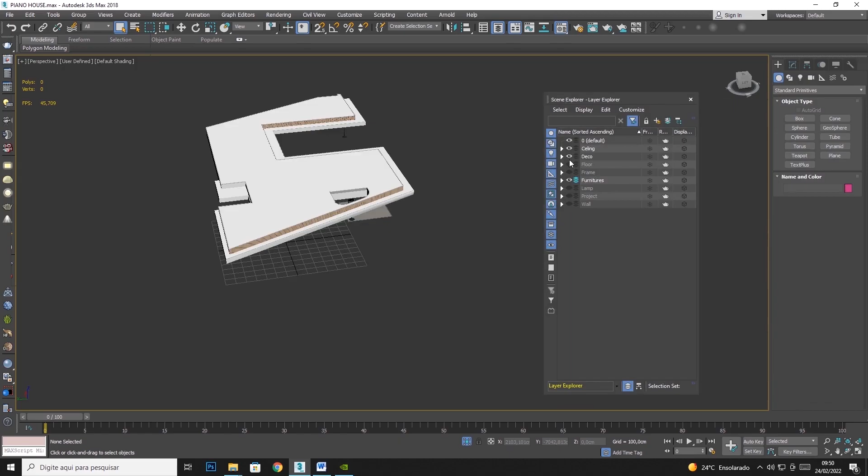This project here, we don't need to use it because it won't go to Unreal. A very important thing is to map the number one channel to take the project to Unreal. It's not really essential, but it's a good strategy to do for some objects based on one criteria. Let me show you what the mapping of the number one channel is, on Unreal.

What's the criterion I'm going to use to define if this object needs to be mapped 1 for 1? Let me open a parenthesis here. When we talk about Unreal Engine 5, we basically use the Lumen technology, which we'll talk about when we get to Unreal Engine 5.

In Unreal Engine 5, if we use the Lumen technology, we don't need to open the mesh, meaning we don't need to open channel 2. Using Unreal Engine 4, the light information—something we call build—is stored in channel 2 of our model. With Unreal 5, specifically Lumen, everything happens dynamically. The ray tracing happens instantly, so we don't need to store the light information, the build result, the render result, in channel 2. We don't need channel 2. Basically we just need channel 1.

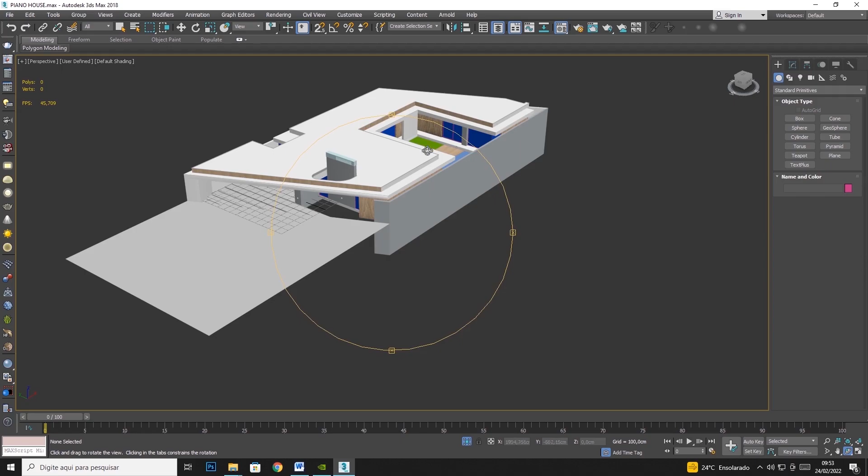Channel 1 is responsible for storing the texture. When you're inside 3ds Max, Blender, or Maya, you apply texture to your model—you open the materials, pick the material, apply a texture, and put it on your model. When you do this, you're applying the texture to channel 1 of your model.

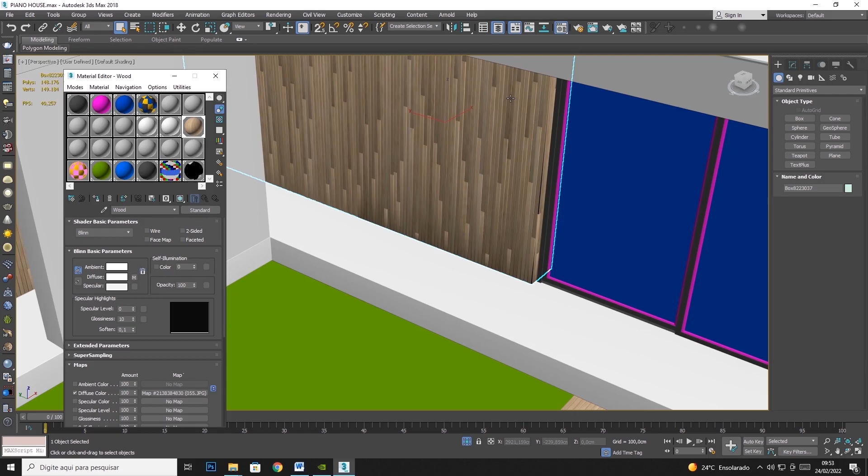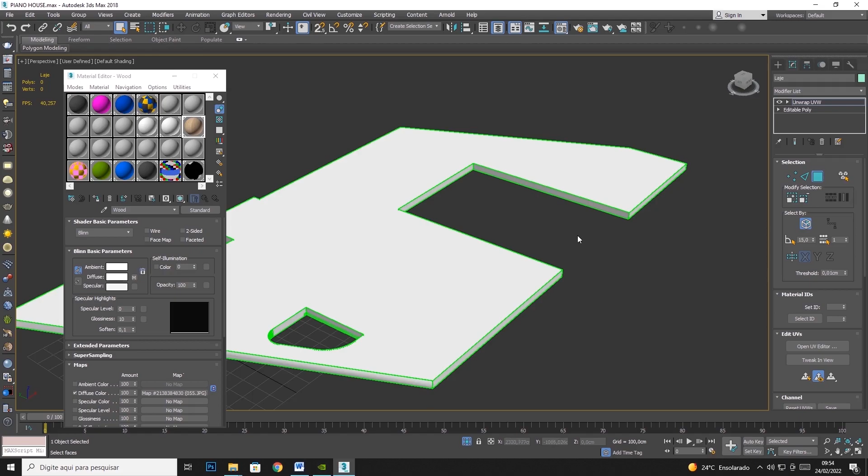Let me isolate this. If I apply a modifier here called unwrap—you don't need to do this, I just want to show you what Max does. When you put a texture, like a wood texture, 3ds Max uses channel 1 of your object by default. Look at this, it's mapping channel 1. Let's open the editor, look at this.

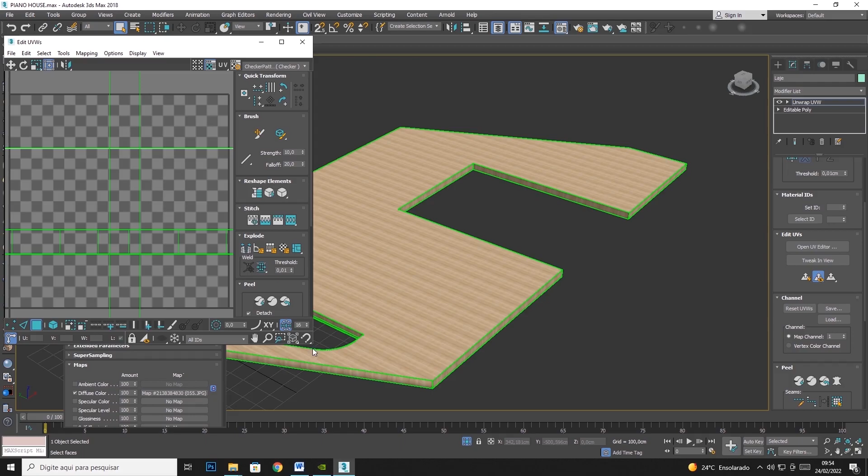Obviously the mesh is not open—it's not mapped so the cuts are correct and thought out at the time of opening. As we're talking about the masonry, the ceiling of our project, we don't need to map each area specifically for this project. But if you have an armature or some model that needs specific mapping of channel 1, you would do that specific mapping inside the UV editor—but it would still be mapped to channel 1.

When you talk about Unreal Engine 4 and 5, there are many ways to process lights, materials, and bouncing. You have dynamic lights, the build process, and Lumen. There are several ways to do the same thing. In this course, we're going to talk specifically about the Lumen technology, where there's no need to render the light.

When using Unreal 4 or 5 with the build technology, we need channel 2 to store light information during the build process. But in our case, we use the Lumen process, where everything—calculations, bounces, direct and indirect lights—is done dynamically, in real time. Using this technology, or ray tracing which is also possible, there's no need to open channel 2. So in our course here, we'll only worry about channel 1.

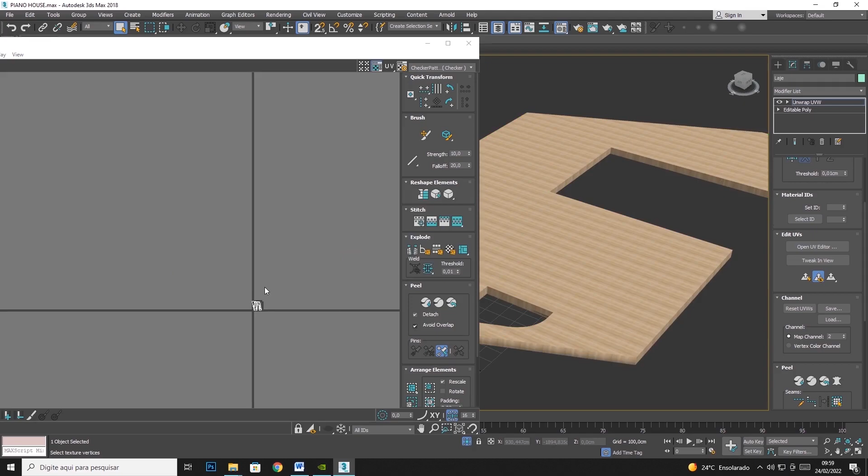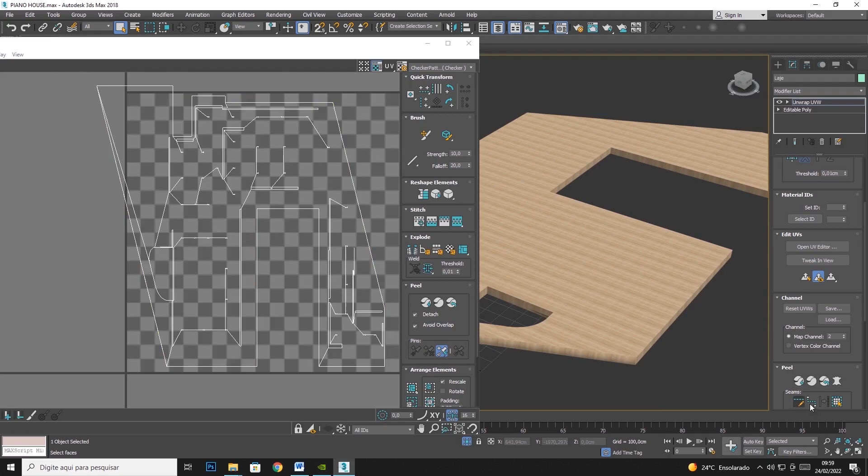With Lumen, it's not necessary to use the number 2 channel. Look at this, I don't have the mapping done here in channel 2, just on channel 1. If we were using a build in Unreal Engine 4 or 5, we'd have to worry about mapping channel 2 too, but that won't be necessary since we're using Lumen in Unreal Engine 5.

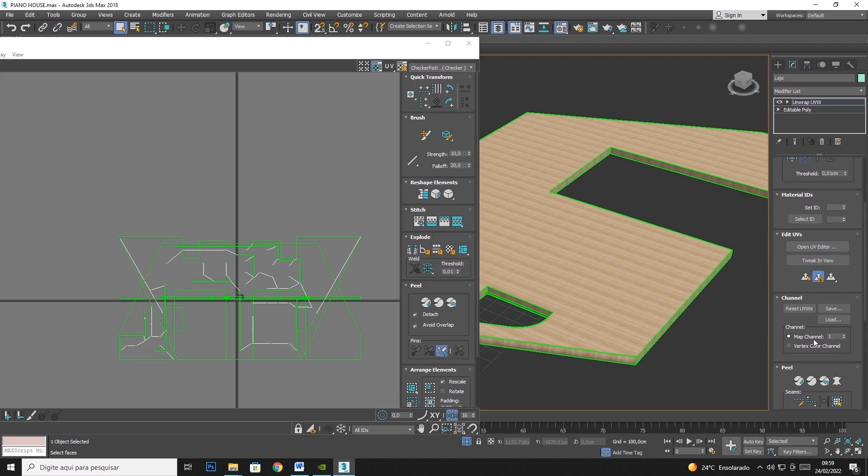Let's get back to the number 1 channel. All the materials that you apply on your model go to channel 1. What's interesting is that you leave channel 1 mapped at 1 by 1, meaning 100 centimeters by 100 centimeters, because it makes it easier when you need to increase or decrease the texture repetition inside Unreal.

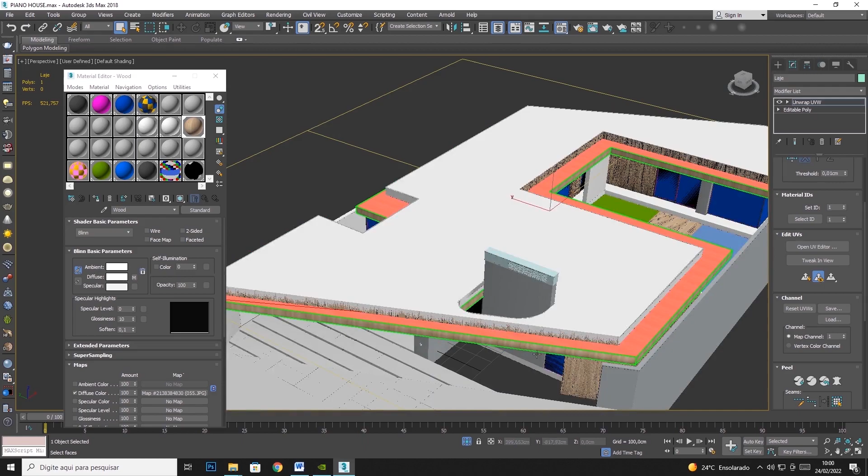It's a good tip, because, for example, let's take the ceiling off and look at the floor instead — it makes more sense. Look at the floor of the house. Let's say in our project it's a white floor. Let's take a material here, white floor, and apply it here.

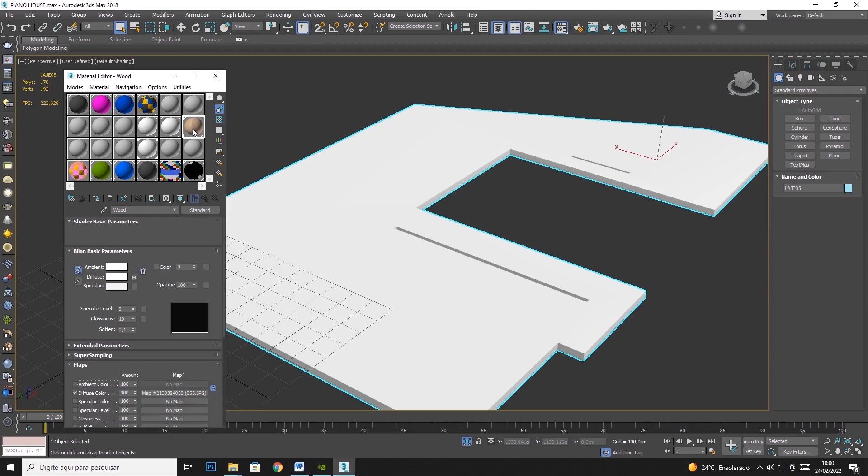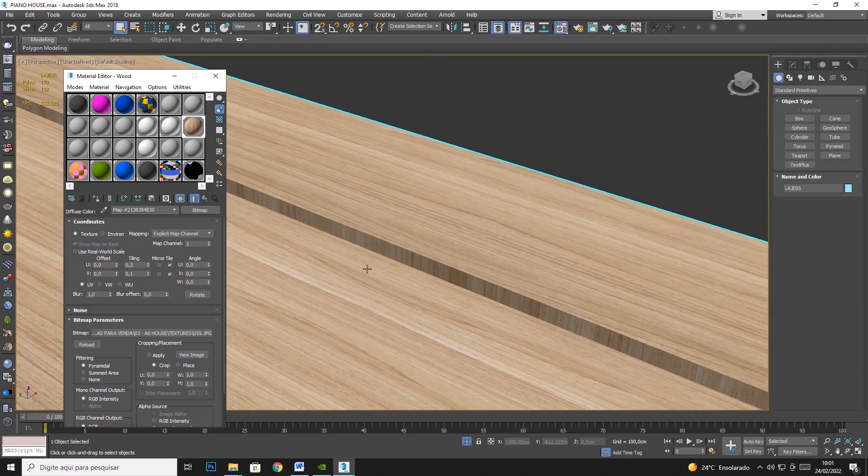Let's think about wanting to create an interaction inside Unreal where your client can exchange materials in the project — at some point placing a wooden material. It's interesting for your material to be mapped 1 by 1, because if you want to increase the wood grain size in Unreal, you can do it without going back to 3ds Max to adjust it. Look, we can increase or decrease the wood grains inside 3ds Max too. Perfect.

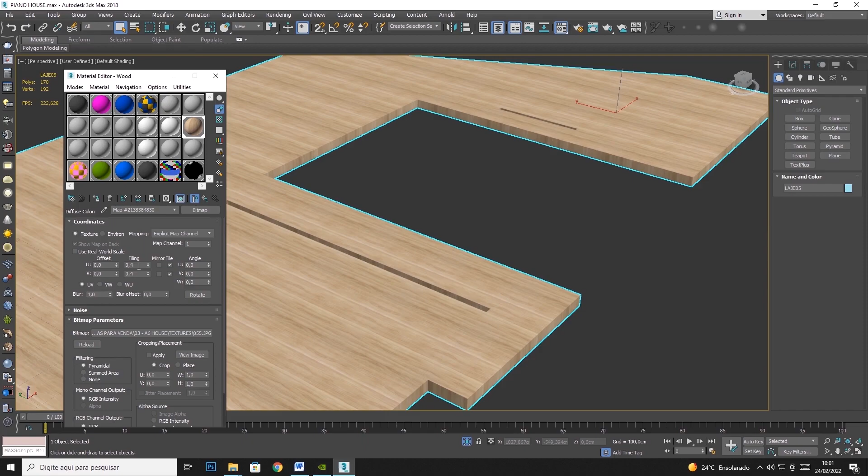You can also do it inside Unreal, but it's interesting if you keep a consistent pattern, because later we'll learn that when creating materials, we'll create a master material — our main material — and we want other repeated materials based on that master material. So think with me: if you have a floor mapped 1 by 1, and you use the wood texture for that floor, then you go to another element, for example this wall here.

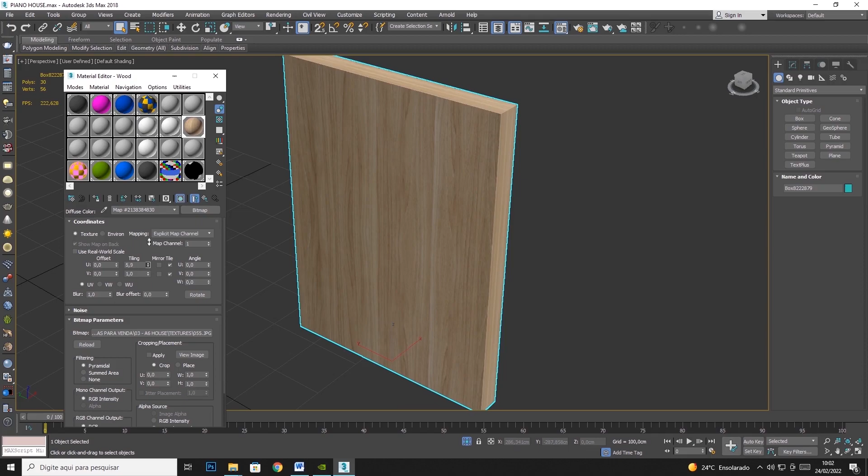If the wall's mapping is 2.5 for 1, and you want to apply the same wood texture on another random element where the mapping is 5 centimeters for 50 centimeters, it's going to get really complicated. We'd have to create a lot of materials with different measurements, which would be confusing and leave things disorganized inside Unreal. So it's best, whenever possible, to map things 1 by 1, because when you put a wood texture on the floor, it will also work the same way on the glass or other elements with the same repetition, since all the models were modeled at the same scale.

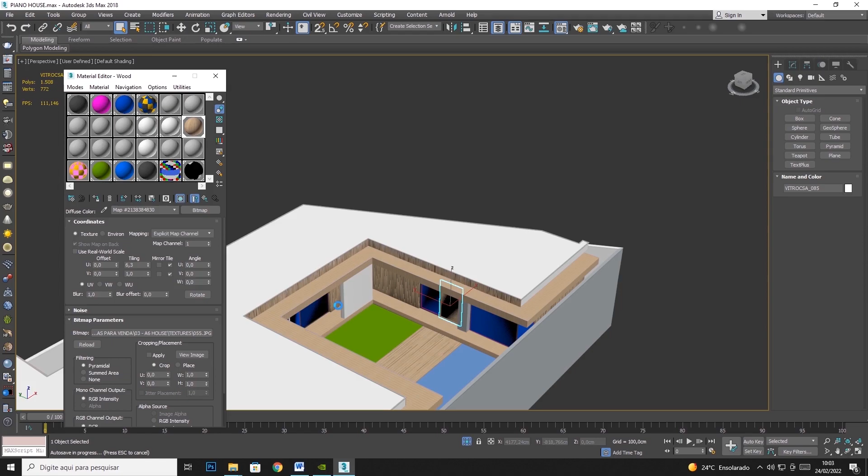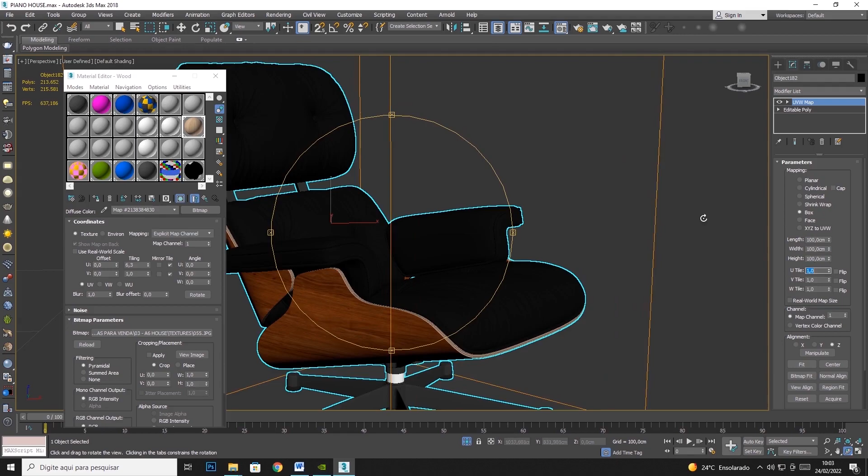But there are some exceptions, for sure. For example, let's suppose you have this armchair — on this chair specifically, it has a very specific mapping, with one direction here and another there. So it doesn't make sense to use 1 by 1 mapping here, because you'll mess this model up. Look at this, it's not really good. So it does make sense to treat it differently, because here the mapping is very specific, and you probably won't change the wood grain size — so it's okay to create a separate material for this specific object.

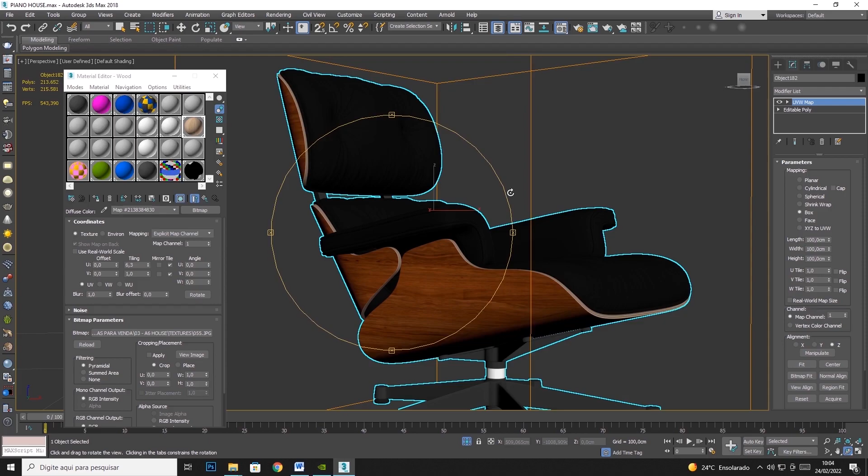But for general objects like walls, floors, pergolas — things where you might want to increase or decrease the texture repeat size — it's best to leave them mapped 1 for 1. So let's do it. I'm going to explain how. Control plus Z, or you can simply delete the modifier.